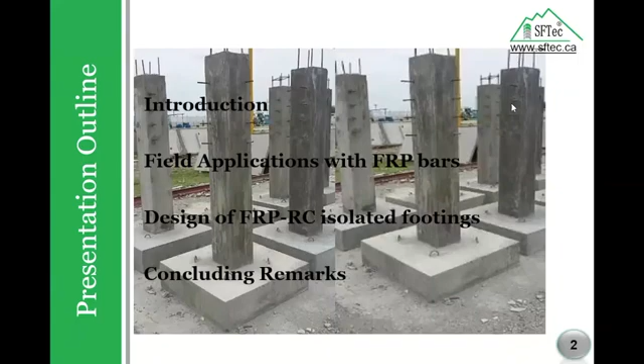In the beginning, I would like to introduce our company, SFTec. Who are we? SFTec is a qualified entrepreneurial industry in the business of composite rebar. What do we do and who do we work with? SFTec is working closely with national and international engineering firms and government departments in the construction of parking facilities, water treatment plants, and retaining walls, as well as other structural elements.

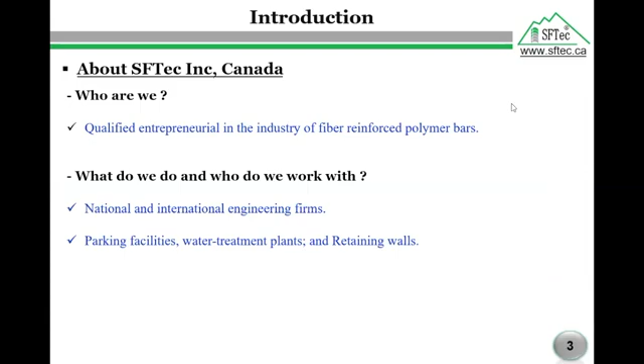What is our focus? SFTec is focusing on the market of FRP rebar application in North America and beyond, through providing a complete design for new structures reinforced with FRP bars, and conducting research and development strategies to ensure continuous improvement of SFTec products.

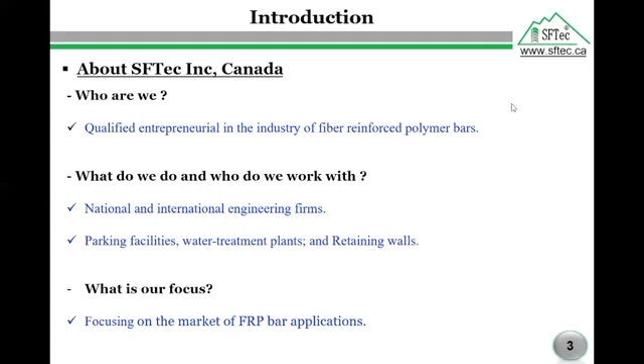The question now, what is the composition of FRP material? As per the microscopic analysis on our right side, we see that FRP materials consist of fibers, resin, and the interface between fiber and resin. FRP materials may be bars or sheets. We are using the bars as a creative solution to eliminate corrosion steel problems, while the FRP sheets are used for strengthening and rehabilitation purposes. In our presentation, we will focus on FRP bars.

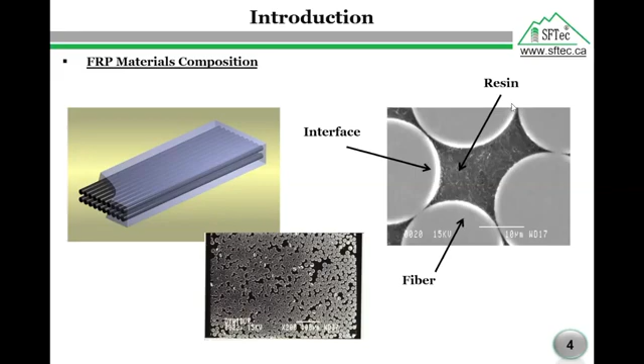Now, what are the types of FRP bars? In the market, we have three main types called carbon FRP, aramid FRP, glass FRP, and recently we have a type called basalt FRP bar. This figure represents the typical stress strain curve between steel and FRP bars. There is only one difference between steel and FRP, as we see here: FRP bars are linear up to failure without any ductility or yielding point, unlike steel bars.

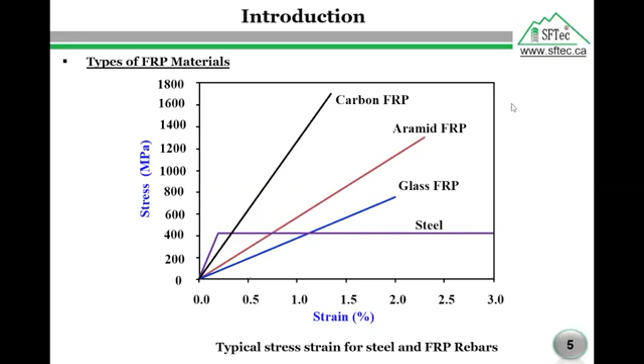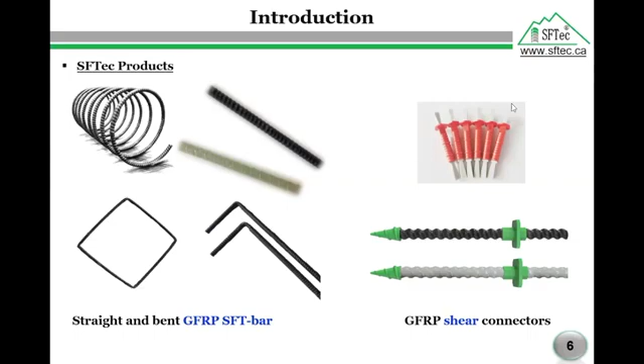SFTec products: in our company, we are mainly focusing on the production of GFRP materials in terms of straight bars, bent bars, closed loops, and spirals. We also have a GFRP material called GFRP connectors for sandwich panels.

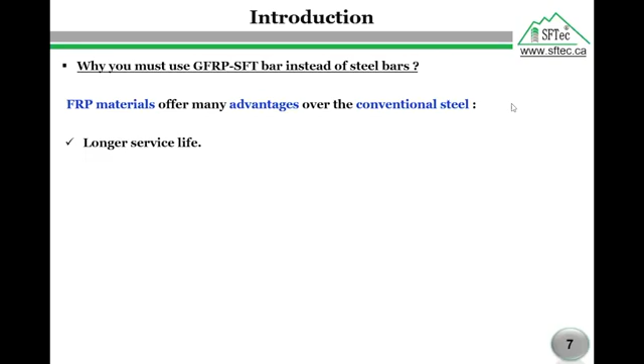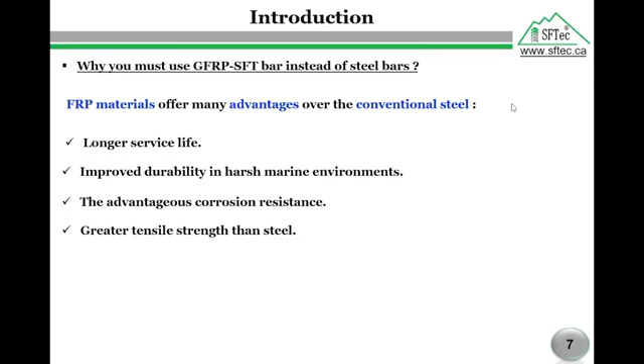Why must you use GFRP-SFT bar instead of steel bars? In the last 10 years, FRP bars have been used successfully in hundreds of bridges, parking lots, tanks, and marine structures across Canada and US. FRP materials offer many advantages over conventional steel bars, like longer service life, improved durability in harsh marine environment, the advantage of corrosion resistance, high tensile strength compared to the yield stress of steel, lighter than steel, no corrosion even in harsh chemical environment, and finally, neutrality to electrical and magnetic disturbance.

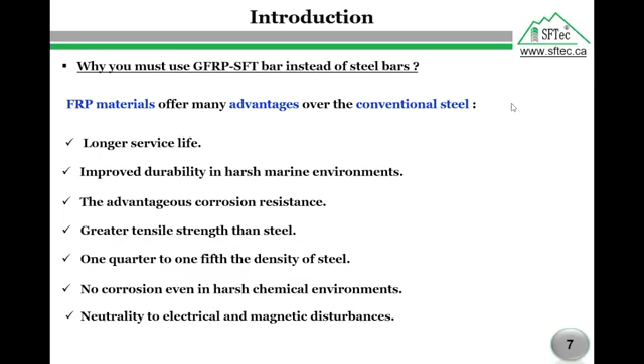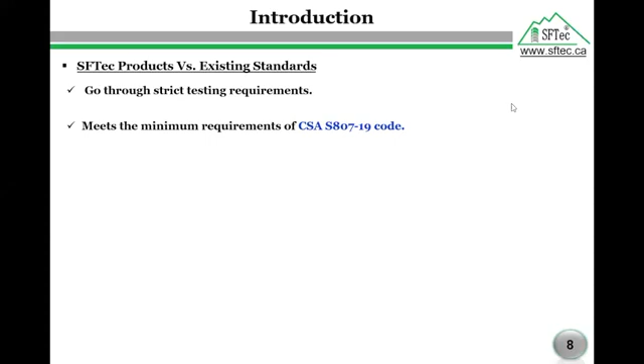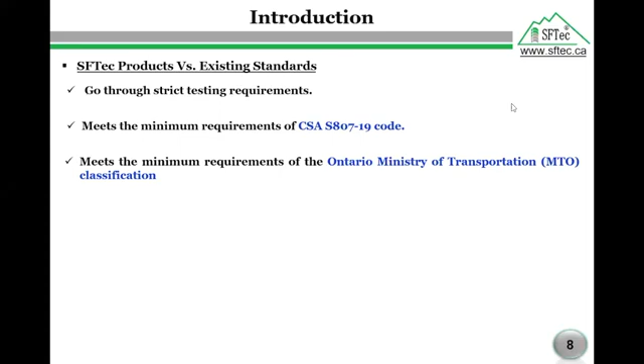SFTec products versus existing standards: our products go through strict testing requirements before they are approved for the market as cost-effective reinforcing materials instead of corrosive steel bars. Our rebar satisfies the minimum requirement of the specification for fiber reinforced polymer code CSA S807 to the year 2019. Also, our rebars meet the minimum requirement of the Ontario Ministry of Transportation classification to be considered for infrastructure works in Ontario province.

The FRP testing includes three main categories: the first is physical properties test, mechanical properties test, and durability test.

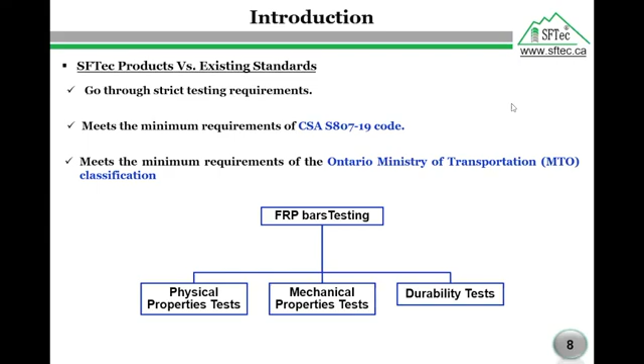As an example, I will give you detailed information on the mechanical requirements of the Canadian standard CSA S807 MTO versus SFT-bar for the mechanical properties of GFRP bars of size number 6. Size number 6 here means 20 millimeter.

As we see in the first row, the tensile strength of SFT-bar exceeds the minimum requirement of the Canadian standard CSA S807 to the year 2019 and MTO by 60% on average. Also, as we see on the second row in this table, the elastic modulus of SFT-bar exceeds the minimum requirement of the CSA S807 and the MTO by 8% on average.

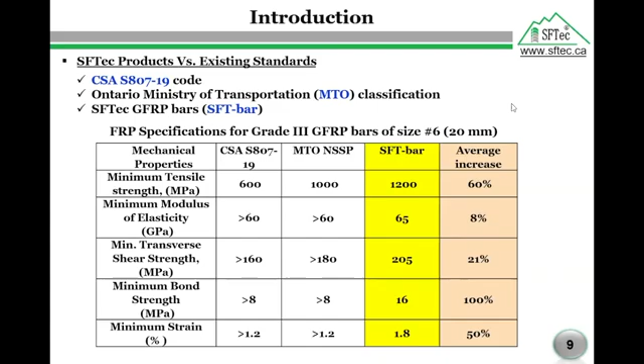For other mechanical properties, our rebars also exceeded the minimum requirements of the Canadian standard CSA S807 and MTO.

Available FRP bars in the market. This table represents the available FRP sizes in the market as per the Canadian standard S807 to the year 2019. As we see here, the available bar sizes range from 6 millimeter to 36 millimeter. Sometimes you will hear that GFRP bar number 1 - so when you hear GFRP bar number 1, it means you have GFRP bar with 6 millimeter diameter, and so on, as we see here in this red column.

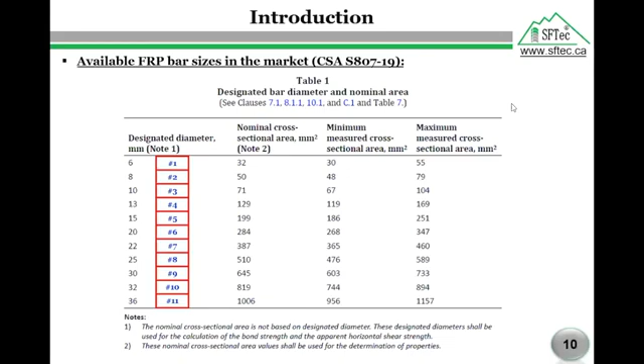Now I will talk about foundations. Generally, we always hear about two different expressions related to foundation engineering, which are footing and foundation. So what is the difference between foundation and footing? Foundation is the lower part of the building structure that transfers the building's gravity loads into the earth. Foundations are commonly separated into two categories: shallow foundations and deep foundations.

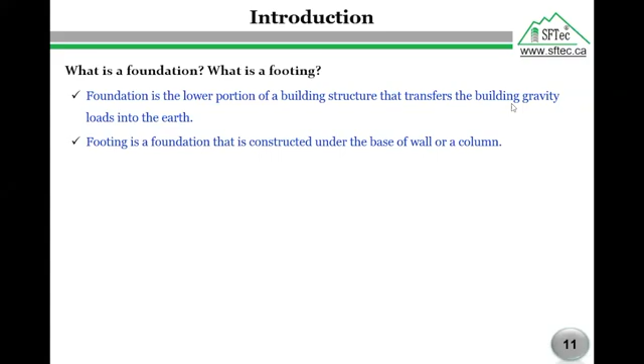Footing is a foundation that is constructed under the base of a wall or a column. The purpose of footing is to distribute the weight of the building over a large area. The term footing is generally used in conjunction with shallow foundation, not deep one. Footing is placed directly below the lowest part of the structure it supports.

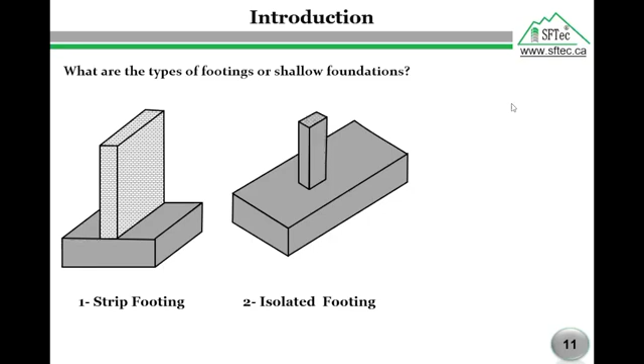Number two, isolated footing. Isolated footings are the most common type of foundations in ordinary structures. They are used to distribute column load on a relatively large area of soil. As we see here, this photo represents isolated footing, and here the transfer of load will be in two directions versus the strip one, where the loading is in one direction only.

The fourth type we have here is called strap footing. If one of the footings is very close to the property line, then a stiff beam is used to connect the column to an interior column. This type is called strap footing, as we see here - we have two isolated footings connected with a beam. This beam is called strap.

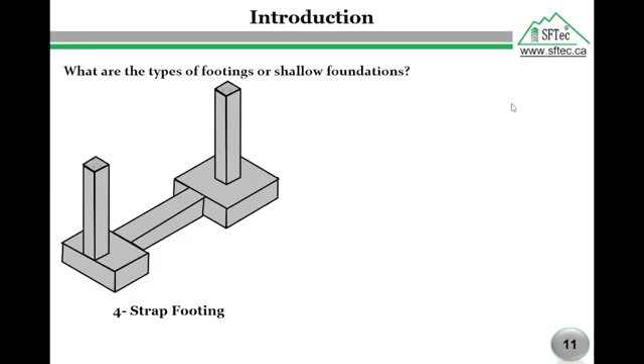And the last type we have is called raft footing. If applied loads are heavy, or more than 60% of the isolated footings overlap, a raft foundation is used to support the entire structure, as we see here. This one is similar to an inverted flat slab in which it contains column strips and middle strips.

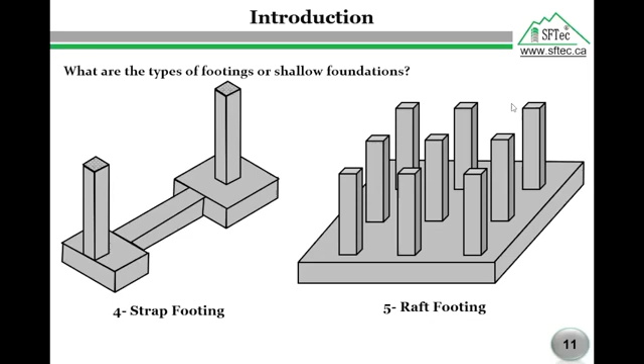So now I will talk about the soil pressure under footing subjected to concentric loading. The actual bearing capacity differs significantly according to the type of soil, stiffness of footing, and loading conditions. In general, the distribution under the base of the footing is non-uniform, as we see in this sketch, which represents the distribution of stresses under a footing for sandy soil.

Assuming the loading is concentric and the footing is rigid, the soil pressure under part of the footing is very high, like a parabola, and on this part is very low. However, for design purposes, the bearing soil distribution is assumed to be uniform, regardless of the type of soil or the stiffness of the footing, as we see here on our right side. This assumption simplifies the calculation of the actual forces acting on the foundation and speeds up the design process.

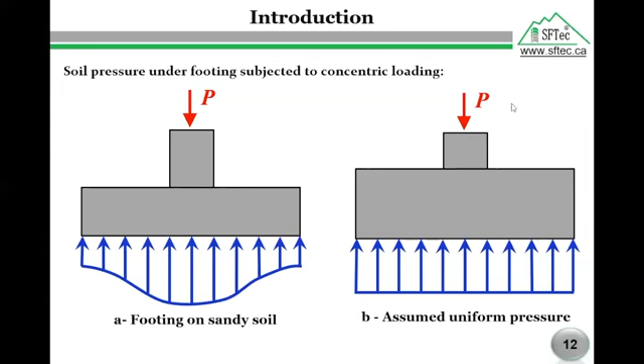So we have a footing subjected to a concentrated load called P. What are we going to do here in order to calculate the area of this footing? We will equate the actual stress to the allowable stress.

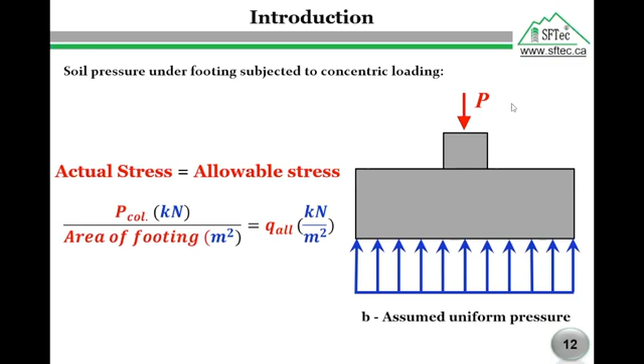The allowable stress here we can call the bearing capacity. We equate the bearing capacity of the soil to the actual stress on the soil. The actual stress is the column load concentrated over the footing area. We have the allowable stress from the soil reports and the column load from the analysis, so finally we can calculate the area of the footing.

Now I will talk about soil pressure under footing subjected to eccentric loading. Foundations may be frequently subjected to eccentric loading resulting from lateral loads due to wind or earthquake. As we see here, we have an isolated footing subjected to a concentrated load combined with moment. The moment developed at the base of the footing produces non-uniform distribution, unlike the uniform distribution we had before with concentrated loading. The moment and the load will coincide on one side and be subtracted on the other side, so we will have non-uniform distribution under the soil.

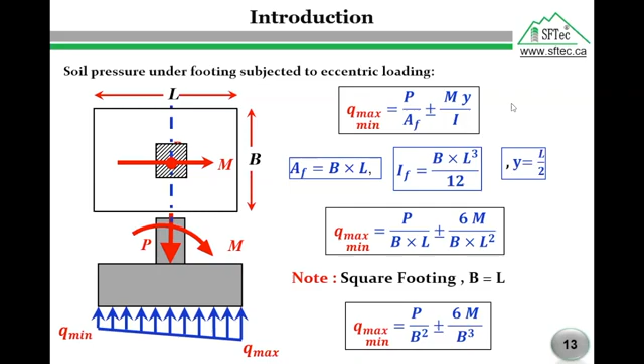The classical stress equation will be used to determine the distribution of the soil bearing. Here we have the footing area called L by B, the moment of inertia equals B times L cubed over 12, and Y equals L over 2. By substituting these three variables into the classical equation, we get a simple formula used to calculate the soil pressure under footings. If we have a square footing, B equals L, so we can simplify this equation to get P over B squared and 6M over B to the power of 3.

Now I will shift to the field applications with FRP bars. I would like to highlight our national and international projects with FRP bars. The first application here is the first worldwide waffle slabs reinforced with GFRP straight and bent bars in the Aria project.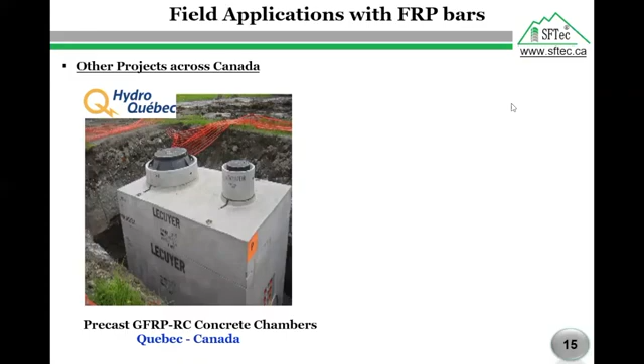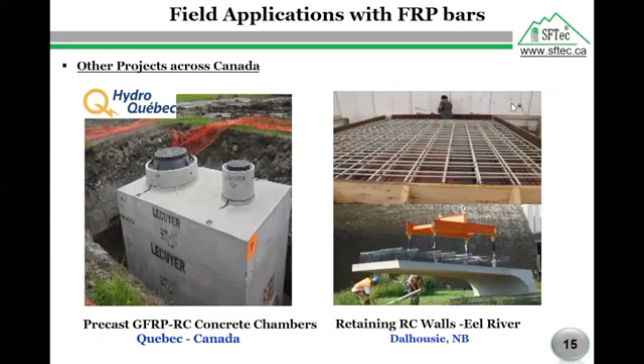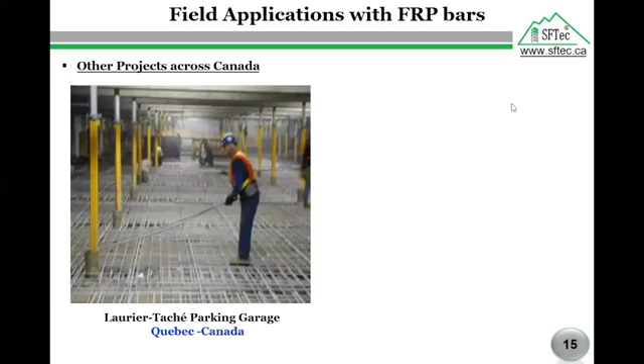Now I will shift to different applications across Canada. The photo on the left represents a project with Hydro-Quebec for a precast GFRP concrete chamber. On the right, we see another example of the preparation and installation of retaining RC walls for Eel River. Another application is reconstructing the deteriorated one-way slabs in the Laurier-Taché parking garage using GFRP bars.

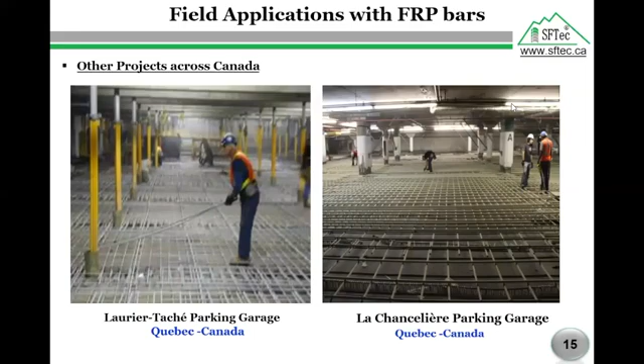The last field application we have today is on the flat plate structure of La Chancelière parking garage in Quebec City. As shown on the right, the flooring slabs of this two-way parking garage are totally reinforced with GFRP bars. It is worth mentioning that several codes and guidelines are available around the world for the design of structural elements reinforced with FRP bars.

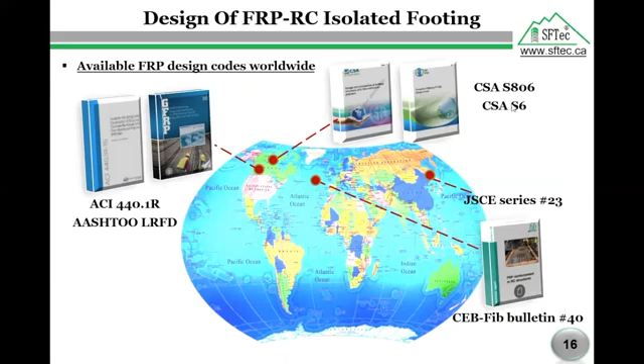The design philosophy of FRP-RC isolated footing. Now I will move to the design philosophy for the isolated footing using GFRP bars. I will talk about the flexural and shear design of such footings, according to the Canadian standard S806 for the year 2012.

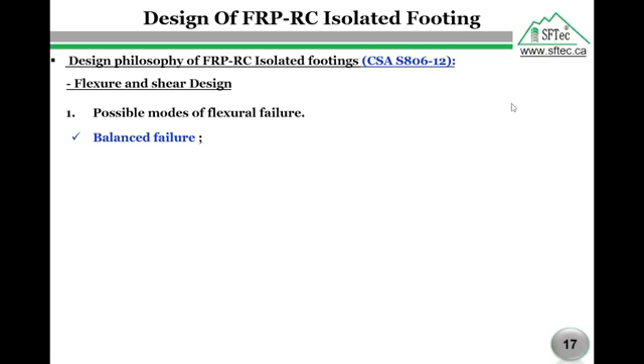We have three possible modes of failure of a concrete section reinforced with FRP bars. The first is balanced failure, representing simultaneous rupture of FRP bars and concrete crushing. The second is tension failure, representing rupture of FRP bars before concrete crushing. The last is compression failure, representing concrete crushing while the FRP bar remains in the elastic range with a strain level smaller than the ultimate strain.

There is one major difference between steel and FRP: FRP bars are linear up to failure and exhibit no ductility or yielding. Another major difference is that serviceability becomes more of a design limitation in FRP reinforced members than with steel, due to lower modulus of elasticity; deflection and crack widths will govern the design.

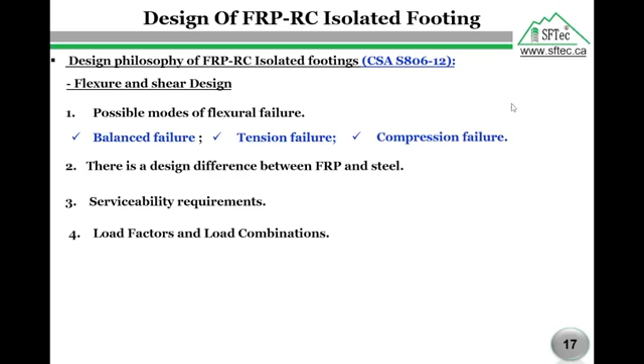Load factors and load combinations: according to the Canadian standard S806, the code uses the same load factors as in the Canadian standard A23.3 for the year 2014. Load combinations are also the same as in the Canadian standard A23.3 for the year 2014, which are based on the National Building Code of Canada.

Material resistance factor: concrete and steel resistance factors remain the same as in the Canadian standard A23.3 for the year 2014, while the FRP resistance factor equals 0.75 for all FRP structures, reinforced or pre-stressed.

The thickness of the isolated footing is commonly governed by the two-way punching shear. So the isolated footing should be checked against the two-way punching shear by comparing the actual shear stress from the acting load on the footing with the allowable punching shear stress using the available code equations.

The check of one-way punching shear is to be performed, even though it is infrequently critical.

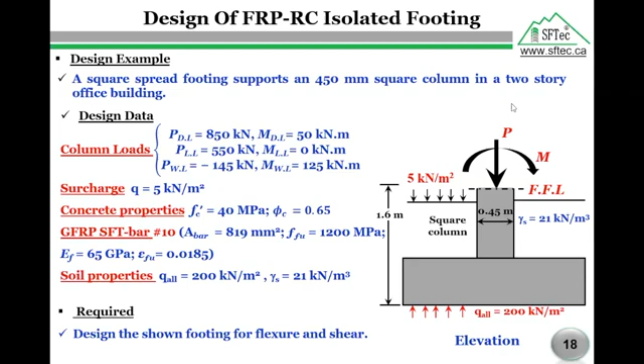In the next slides, we will apply all the mentioned points in the design philosophy of this footing for shear and flexure. In order to have a detailed flexural and shear design for an isolated footing, including serviceability limit state check, as well as one-way and two-way shear check, these following design steps will be performed in the next slides.

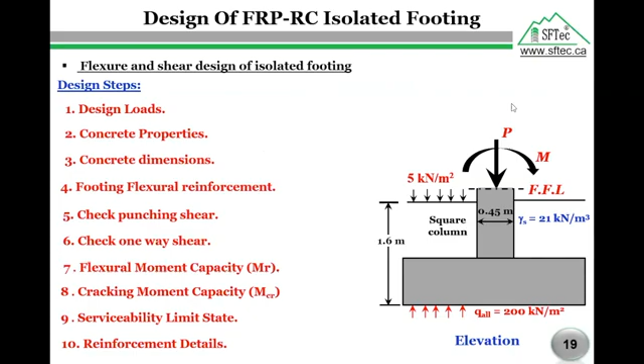We are going to have heavy calculations. I'm advising you to have a paper and take some notes.

The first step here is to calculate different load combinations in terms of service load and ultimate load. As I mentioned earlier, we have P dead load, P live load, P wind load, and the alternative moment for the dead load, live load, and wind load.

What we are going to do now is calculate the service loads. The service load combination we have first is dead load, so we will put under the axial load 850 kilonewton and the moment 50 kilonewton.

The second service load combination is dead load plus live load. So we are going to add 850 to 550, giving dead load plus live load equal to 1,400. M dead load equals 50, M live load equals 0, so finally we will have 50.

The last one is dead load, live load, and wind load. Using the same criteria, we will calculate the axial load and the moment. This last load combination for service load will govern the design, so we are going to take this one in our calculations.

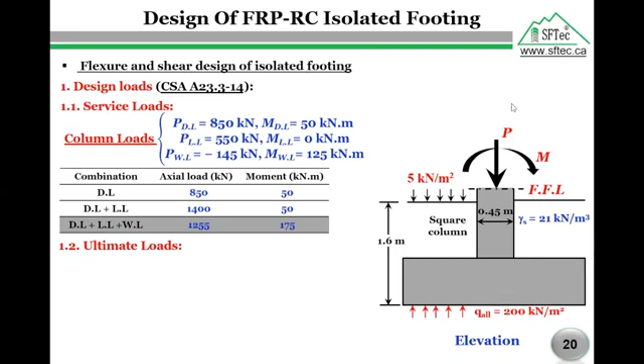After calculating the service loads, the next step is to calculate the ultimate loads as per the National Building Code of Canada and the Canadian Standard A23.3 of the year 2014.

According to these codes, we have 5 loading combinations that may be considered for design of our footing under dead load, live load, wind load. Each load combination should be investigated separately.

However, load combination number 3 will govern the design. So we are going to include the load combination due to ultimate loads number 3 in our calculations for the design of flexure and shear.

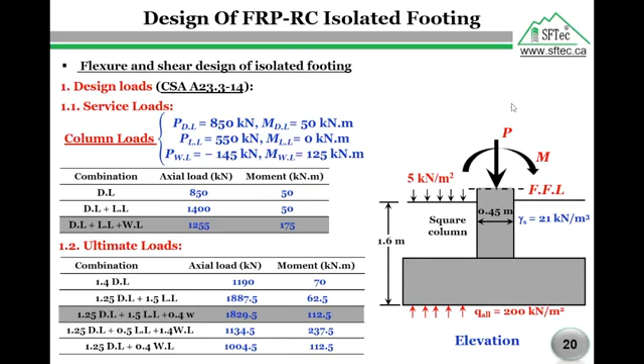The next step is to calculate the concrete properties. As given, the concrete compressive strength equals 40 MPa. So the elastic modulus according to the Canadian standard equals 4,500 times the square root of the concrete compressive strength.

The stress block parameters alpha 1 and beta 1 can be calculated using these two equations as a function of the concrete compressive strength. So alpha 1 and beta 1 equal 0.79 and 0.87 respectively.

Step number 3 is to calculate the concrete dimensions in terms of footing area and depth. Let us start with the footing area. The chosen service load combination will be used to calculate the concrete dimensions.

So the first thing I'm going to calculate is something called Q net. Q net will be the Q allowable minus the weight of the soil on the footing as well as the surcharge. So Q net will be 200, the Q allowable, minus the weight of the soil, gamma S, times the soil depth, plus the surcharge. Finally, Q net will equal 161.4 kilonewton per meter square.

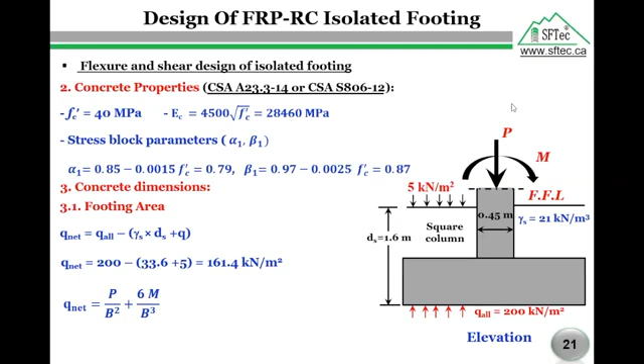We are going to use the equations I explained before in order to estimate the footing area. We here have a square column, so it is preferable to have a square footing. So I'm going to use this equation for a square footing.

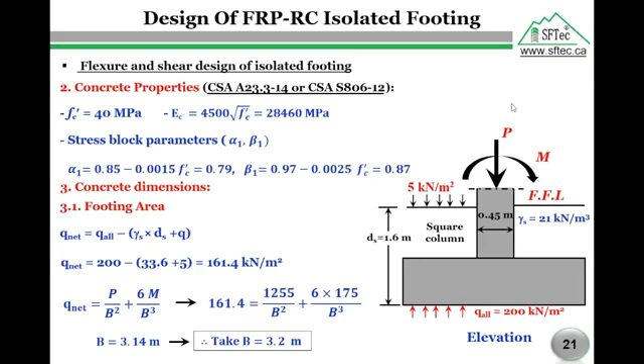So by substituting for the QNet 161.4 and the loads we have from the service load case, P and M, we can get B. B here equals 3.14 meter. By approximating the length of the footing B to the nearest 100 millimeters, we will take B as 3.2.

The next thing we will do is check the normal stresses under the soil. Now we have the footing area and the loads from the service load case, so we will check the maximum and minimum stresses under the footing. The maximum stress under the footing should be less than or equal to the net bearing capacity. The minimum stress under the footing should be greater than 0, because we don't need to have tension on the soil.

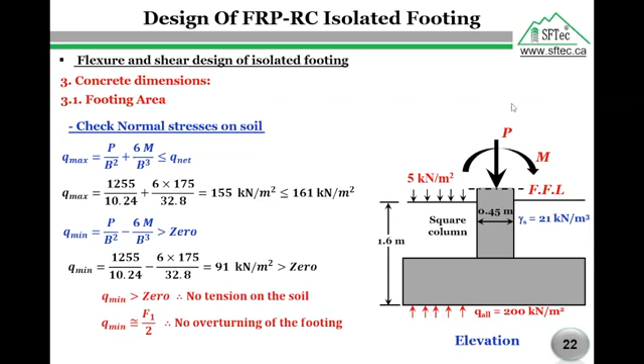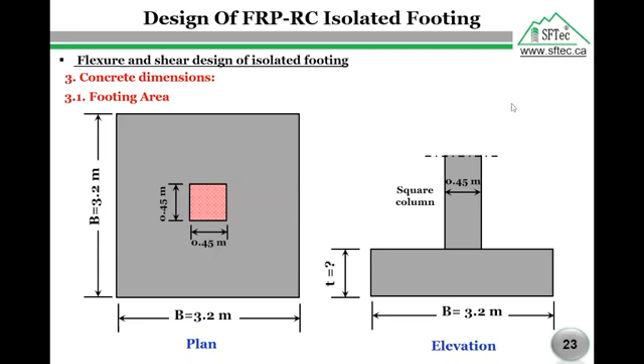Another check we need to do is to have Q minimum approximately equal to half Q maximum in order to avoid any overturning on this footing. So finally, we have a footing area of 3.2 by 3.2 for a square column of 0.45 by 0.45.

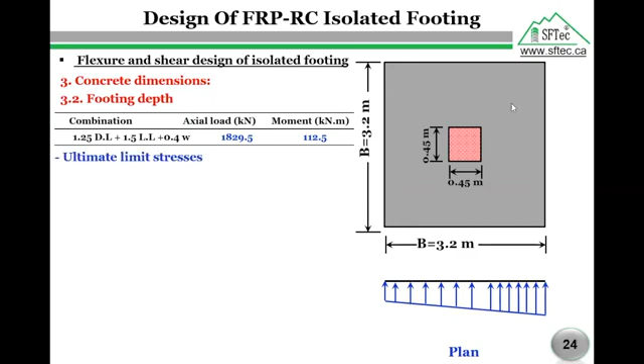Now we will calculate the footing depth. For calculating the footing depth, we will use the load combination from the ultimate loads. We have ultimate axial load 1829.5 and ultimate moment equals 112.5. The next step is to use these loads to calculate the ultimate stresses under the footing.

By using the classical equation of stresses, we will calculate the ultimate stress under the footing. On this side we combine the moment and the shear, and on this side we subtract the load from the axial load and the moment. So we have sigma ultimate one equals 199 kilonewton per meter square, and sigma ultimate two equals 158 kilonewton per meter square.

The maximum factored moment: as shown in our plan, we have two sections to consider to calculate the maximum factored moment on our footing - section I and section II. These two sections are located on the face of the footing. We have here a square footing.

By experience and also by calculations, the two moments for section I and section II will be closely the same. So what I'm going to do is calculate the moment from section I, which is a little bit higher than the moment from section II.

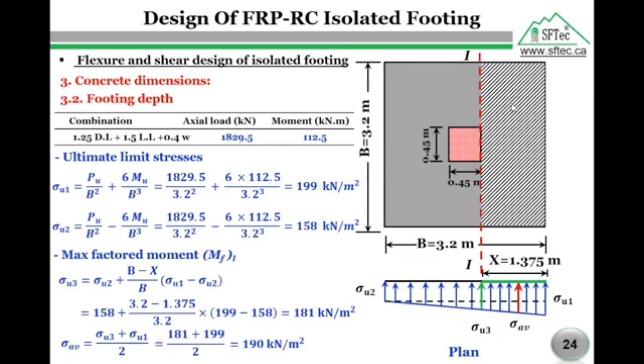Now we have the stress on this face and the stress on the other face. To deal with this area, we calculate the average stress, which will be 190 kilonewton per meter square. We calculated sigma ultimate 3 at the face of the column, and sigma average is sigma ultimate 3 plus sigma ultimate 1. So we have sigma ultimate 3 equals 181, and sigma average equals 190 kilonewton per meter square.

By using the average stress, I can calculate the force on this area. The force will be sigma average times the area, where the area equals B times X. Finally, we have F equals 836 kilonewton.

So I have the force at the centroid of this area. Now I'm going to calculate the moment, which will simply equal F times X over 2. Finally, we have MF for section I equal to 575 kilonewton per the entire width B.

Now we calculated the moment, the maximum factored moment on the critical section. Next, I'm going to calculate the flexural depth, using this equation. The flexural depth here equals 670 millimeter. This equation basically is not Canadian standard.

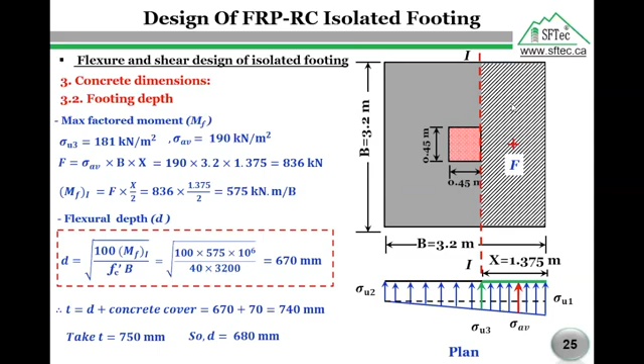So 670 plus 70 equals 740 millimeters. We will approximate this value to the nearest 50 millimeters, so we are going to take the total depth of the footing as 750 millimeters, with a concrete cover of 70 millimeters. Finally, the depth will equal 680 millimeters after this approximation process.

In this step, I'm going to calculate the footing flexural reinforcement. Let us start with the spacing between the reinforcing bars. According to the Canadian standard S806 of 2012, S maximum should be the minimum of 3 times the footing depth or 300 millimeters. So now we will choose the minimum of them, which is 300 millimeters.

What I'm telling you now is to use 80% of this maximum spacing in order to get good results and save crack widths and deflections. You can start with 300 millimeters, but you should try another spacing less than 300 millimeters. We agreed to use number 10 bars of SFTec. So we will put a single layer of number 10 bars every 240 millimeters in each direction, and we can calculate the total amount of flexural reinforcement using this equation.

By using this equation, we will need 14 number 10 bars across the entire width of the footing. We have the flexural reinforcement amount, we have the depth of the footing, and we have the width of the footing, so finally we can calculate the flexural reinforcement ratio.

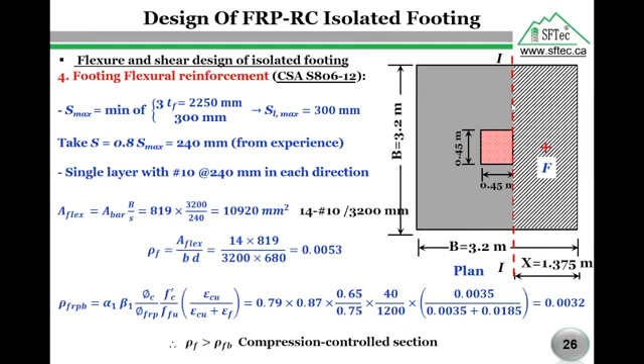Using this equation to calculate the balanced flexural reinforcement ratio of the designed footing, by comparing the flexural reinforcement ratio with the balanced one, we will have a compression controlled section. The compression controlled section is a desirable mode of failure, which is preferred by the Canadian standard S806.

After calculating the flexural depth, we need to check the punching shear capacity of the footing. In order to do so, we need to calculate some properties for the critical section.

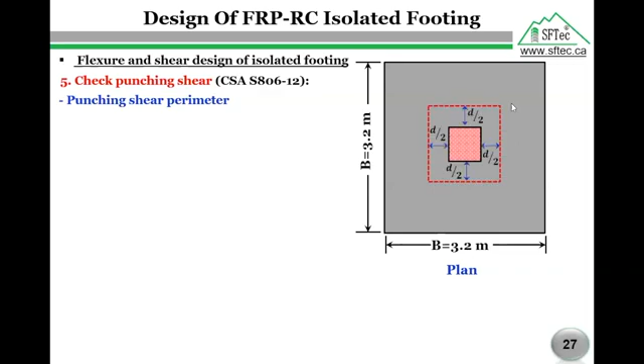The critical section, as we see here on our right side, is located at d over 2 from each face of the column. So the critical shear section dimensions will be B1 and B2. B1 equals C plus D, and B2 equals also C plus D. So B1 equals B2, and finally we have 1130 millimeters.

The punching shear perimeter will be the summation of these four sides, so we have 2B1 and 2B2. Finally, B naught at 0.5D will equal 4,520 millimeters.

Now we need to find the tributary area. That is like the force pushing down, and it separates the critical shear area around the column from the rest of the footing. We have to subtract the punching shear area from the footing area in order to get the tributary area. So the shaded area we have here is called the tributary area.

How are we going to calculate it? We are going to subtract the area of the footing minus the punching shear area. So finally we have the tributary area equals 8.96 meters squared. Using the same criteria, we can calculate the moment of inertia for the tributary area, which will equal 8.6 meters to the power of 4.

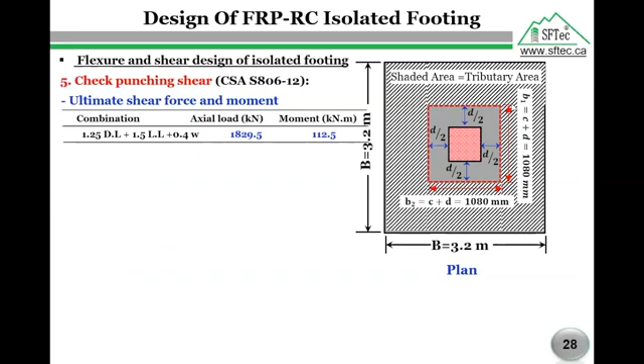Now we need to calculate the ultimate punching shear force and the ultimate moment acting on this footing at the face of the punching shear area. Since none of the load combinations we have generates uplift, it can be concluded that the shear on the boundary of the concrete punching shear area is proportional to the tributary area. So V will equal P ultimate times the tributary area over the area of the footing.

So V ultimate will equal 1,601.

Moment on the boundary of the critical section is proportional to the ratio of the moment of inertia to the total area. So we have M ultimate equals 111 kilonewton meter.

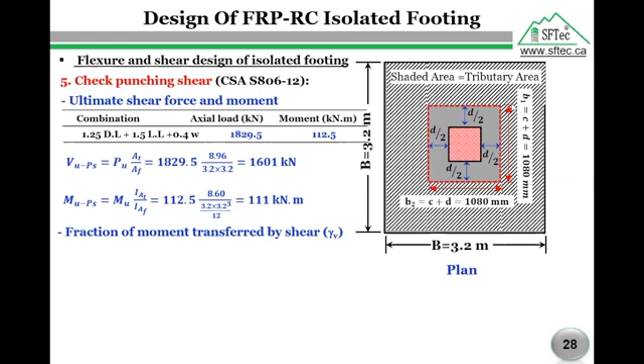The portion of this moment is transferred by eccentricity of shear, so we need to calculate the fraction of moment transferred by shear. This is called gamma V, and it can be calculated using this equation. We are going to consider only 0.4 of the ultimate moment to be transferred by shear.

The ultimate punching shear stress due to moment and axial load can be calculated using the eccentric shear model as per the Canadian standard S806 to the year 2012. So finally, we will have VF equals 0.56 MPa.

The ultimate factored shear stress is now known. The next step is to compare it with the allowable punching shear stress to check if it is safe or not. The punching shear strength will be the least value from these three equations.

In these equations, we have new terms that should be determined. Alpha S is based on the column location; we have an interior column here, so alpha S will equal 4. Beta C, the ratio between the longer and shorter sides of the column, is equal to 1.

The elastic modulus of the used bar equals 65 GPa. The flexural reinforcement ratio equals 0.53%. The factor lambda is based on the concrete type; we have normal concrete here, so lambda will equal 1.

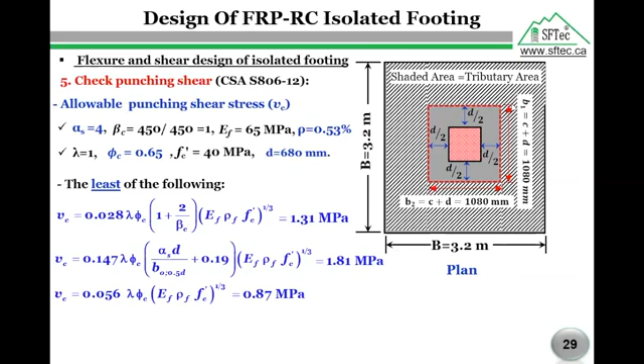By comparing the allowable stress with the actual stress we calculated, our footing is safe and there is no need for transverse shear reinforcement.

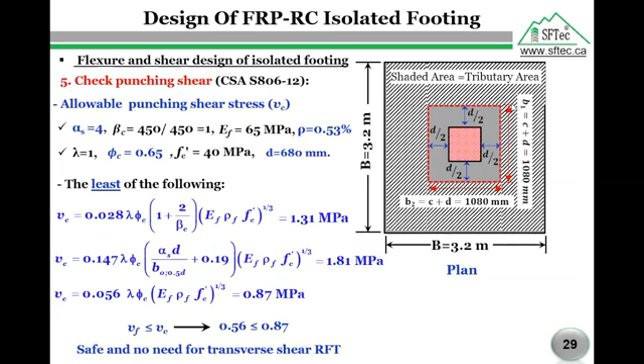So now I'm going to check this footing for one-way shear. The critical shear section for one-way shear is located at a distance called dV.

dV, according to the Canadian standard S806 to the year 2012, equals the maximum of 0.9d and 0.72h. So 0.9d equals 0.9 by 680, or 0.72h equals 0.72 by 750. We are going to select the maximum value, which equals 612.

What we are going to do now is calculate the moment and shear at the face of the critical shear section. To do so, we will calculate the stress at the face of the tributary area and the stress on the other side, then get the average stress under this shaded area.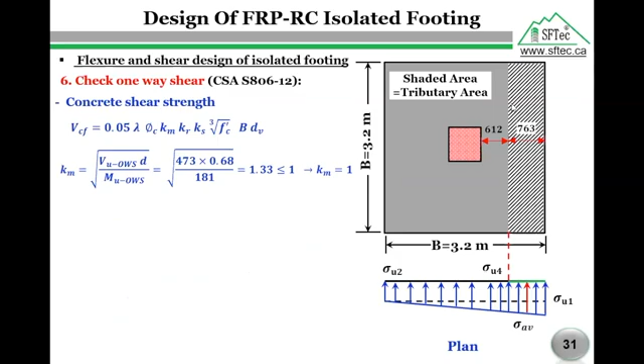The one-way shear strength can be calculated using this equation according to the Canadian standard S806. In this equation, we have some important factors affecting one-way shear: the first term, Km, is a coefficient taking into account the effect of moment at the section on shear strength, and Kr is a coefficient taking into account the effect of reinforcement rigidity on shear strength.

And finally, we have Ks, which accounts for the effect of member size on shear strength. Finally, one-way shear strength equals 1,149 kilonewton. By comparing both allowable and ultimate one-way shear strength, our design is safe. So this footing is safe for one-way shear.

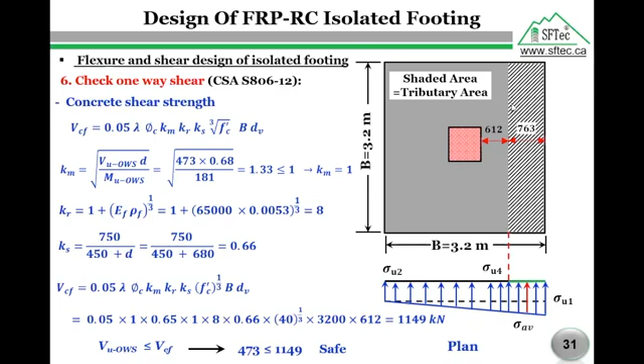In step number 7, we will calculate the footing flexural moment capacity as per the Canadian standard S806 to the year 2012, using this equation. All variables in these equations are known or calculated before, except the neutral axis depth.

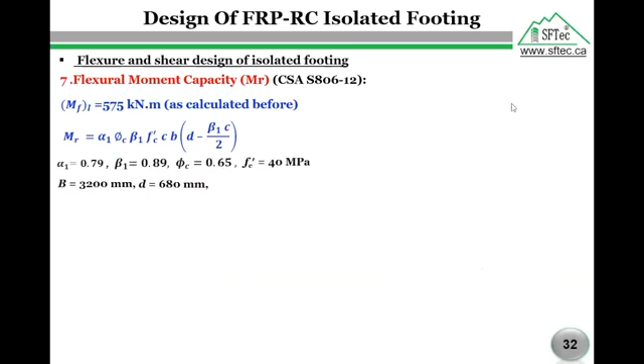So here we have alpha 1, beta 1, gamma C, phi C, FC, B, and the flexural depth. The unknown variable for us now is the neutral axis depth. From equilibrium, we can get the neutral axis depth by equating the compression force with the tension force, so the neutral axis depth equals 136.4 millimeters.

Before going to calculate the flexural moment capacity, we need to check the neutral axis depth to the flexural depth of the footing. This ratio shall be greater than this term.

By dividing 136.4 over 680, it will equal 0.2. This term should be greater than 7 over 7 plus 2000 divided by the ultimate strain in the used bar.

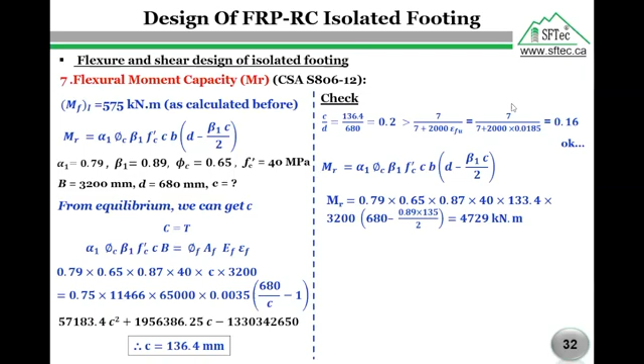Now we can calculate the flexural moment capacity of the designed footing. The flexural moment capacity of the designed footing equals 4,729 kilonewton meter. By comparing the footing flexural moment capacity and the maximum factored moment, the footing flexural moment is greater than the maximum factored moment.

The footing cracking moment can be calculated using this equation. By comparing the footing cracking moment capacity and the footing flexural moment capacity, the footing moment capacity exceeds 1.5 times the footing cracking moment capacity.

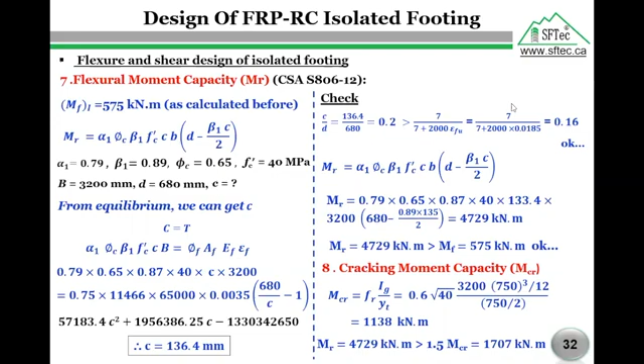Now we will shift to the serviceability limit state check. As we agreed, in order to have a successful design for any structural member with FRP bars, we should check the serviceability limit state because the design is mainly controlled by crack widths and deflection.

In order to do so, we have two checks. The first one is the stress and strain limitation. Let us go with this one.

The ultimate stress in the used bar under service load should be calculated using this equation. The Canadian standard S806 allows using 25% of the ultimate strength of the used FRP bar. So the maximum stress in the FRP bars under full service load should be less than or equal to 0.25 of the ultimate strength of the used bar.

First, we should calculate the maximum moment in the footing under service load in order to calculate the stress in the used bar at service load level. The maximum moment in the footing due to service load will be calculated using the same criteria as we did with the maximum factored moment.

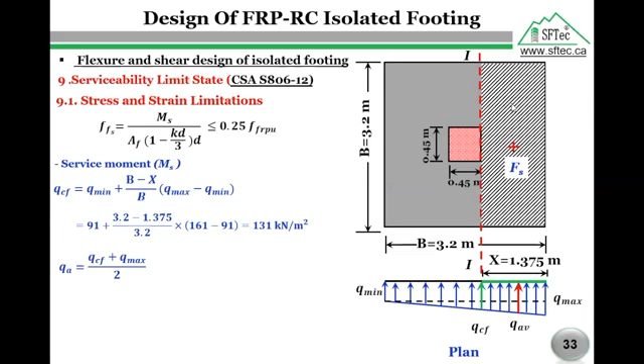Now we are going to calculate the average stress under this area. The average stress equals 146 kilonewton per meter square.

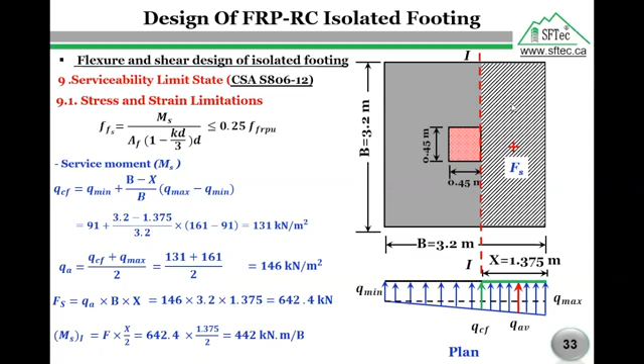Now we can calculate the force at the center of this area. The force equals 642.4 kilonewton. Finally, the moment under service load will equal 442 kilonewton meter per the entire length of the footing.

So now we calculated Ms and we have the depth of the foundation, so the unknown for us is a factor called K. K can be calculated using this equation, which depends mainly on the flexural reinforcement ratio and the modular ratio, Nf.

The modular ratio is the ratio between the elastic modulus of the used bar and the elastic modulus of the concrete. So rho F by Nf will be 0.012, and finally K equals 0.14.

The stress under full service load is 60 MPa. By comparing 60 MPa with 25% of the ultimate strength of our bar, we will have a safe design.

The stress in the bar under service load is known, and the elastic modulus is known from the design data, so now we can calculate the ultimate strain under full service load. The ultimate strain under full service load equals 0.00092, which is less than 0.0015.

So no need to check the crack width parameter. The crack width parameter is the second check that we need to do for the serviceability limit state according to the Canadian standard S806.

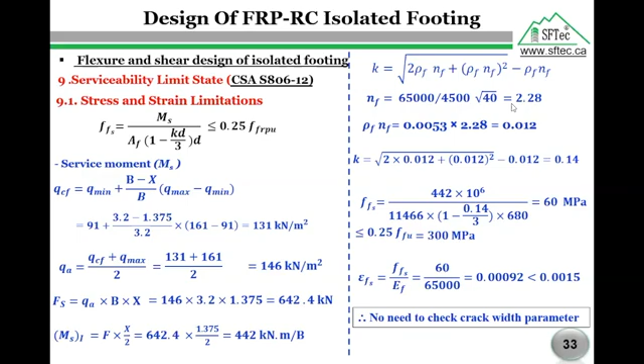Finally, we have here the reinforcement details for the isolated footing we design. As per our design, we will use 14 number 10 bars in both directions.

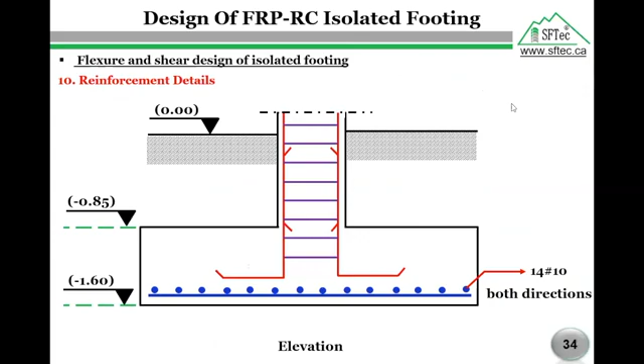Based on the presented slides, I'm going to give these concluding remarks. Number one, FRP bar is a very good solution to reinforce concrete infrastructures located in harsh environments.

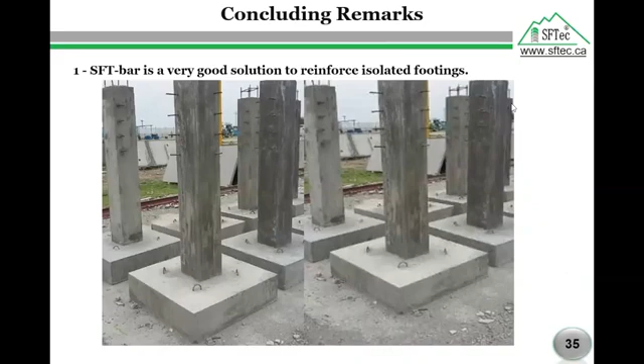FRP rebars have been used successfully in hundreds of bridges, parking garages, pavements, piles, foundations, and other structures across Canada and the US.

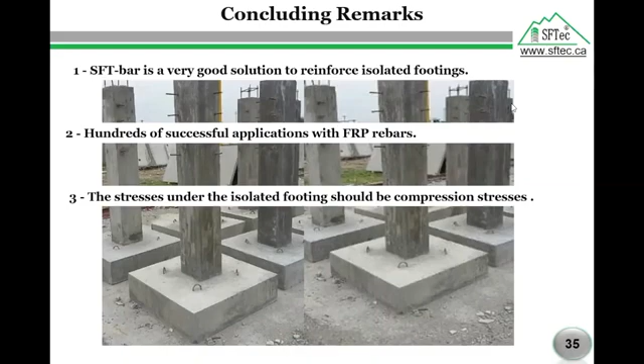The stresses under the isolated footing should be compression stresses in order to avoid overturning of the footing. The isolated footing must comply with the flexural and shear provisions according to the Canadian standard S806 to the year 2012.

Due to the lower modulus of elasticity of FRP bars, deflection and crack widths will govern the design of such footing. The thickness of the isolated footing is commonly governed by the two-way punching shear check.